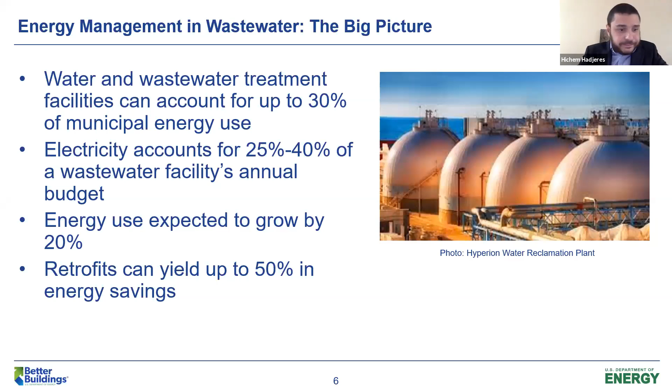Over the years, many examples have been documented that demonstrate significant energy reductions are possible through cost-effective measures. Building on the success, many in the industry are taking a broader, more strategic approach to energy management. To implement the vision, however, wastewater treatment plants are setting ambitious long-term energy savings targets and incorporating renewable energy as well.

We are in the era of big data. We have a lot of data points for everything, but the question is, what do we do with that data once we have it? As the wastewater treatment sector's approach to energy management evolves, the need for reliable and robust energy data management systems is growing as well. These systems help plants track progress towards their energy goals, and they help to determine whether their efficiency efforts are having a meaningful impact. It'll help them uncover opportunities for savings and also allow for comparison to other similar plants.

In short, to stay on the road to resilience and have a robust energy management system, our facilities need robust energy data management. Next slide, please.

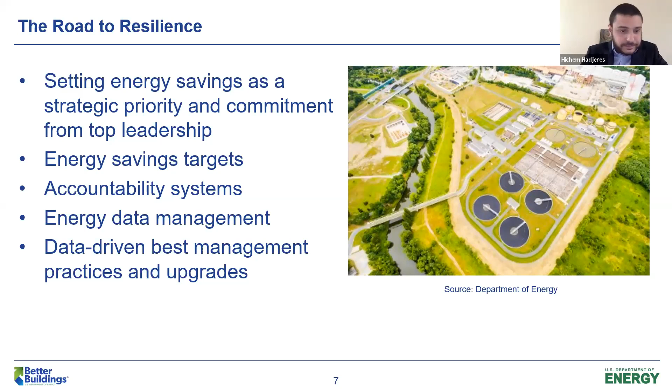So I'll transition to our speakers who will go over these topics. I'd like to introduce Shannon Zaret, who is my colleague at the Department of Energy. She is an energy technical project specialist. Shannon Zaret recently joined our office, and she is our office's wastewater and circular economy lead. Prior to joining the Department of Energy, Shannon served as a project manager for Booz Allen Hamilton, supporting the DOE's ARPA-E research and development programs, which focused on energy storage, waste to energy, and nuclear fusion. She was also at the United States Energy Association, where she worked on the Department of Energy funded consensus program to build global and domestic consensus on carbon capture, utilization, and storage.

Prior to joining the U.S. Energy Association, Shannon supported the U.S. Department of Energy's Bioenergy Technologies Office, nicknamed BETO. While there, she helped advance the office's priorities aimed at developing technologies for producing cost-competitive advanced biofuels from non-food biomass resources. Shannon, the floor is yours.

Thank you very much. Thank you, Hichem. So I'm excited to be here. I'd like to take some time to discuss how DOE has been involved in this space from a Better Buildings perspective. So let's start with the next slide.

Okay, perfect. So specifically, I'd like to highlight one of our Better Buildings accelerators that was designed to catalyze the adoption of innovative and best practice approaches in data management, technologies, and financing for infrastructure improvements and water resource recovery facilities. So the Sustainable Wastewater Infrastructure of the Future Accelerator, or SWIFt, as we refer to it, was a 3-year partnership with 25 state, regional, and local agencies that engage with over 70 water resource recovery facilities in their jurisdictions. And the overall goal was to accelerate a pathway towards sustainable infrastructure.

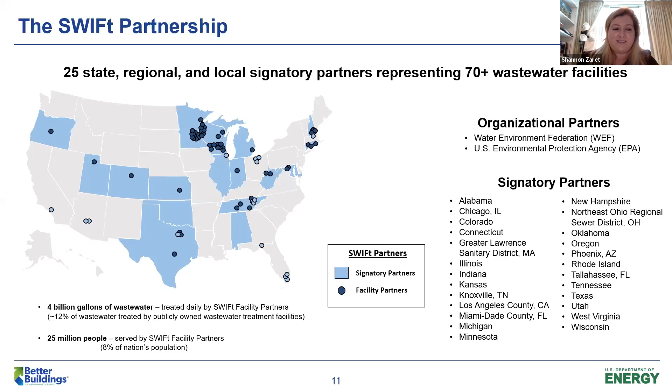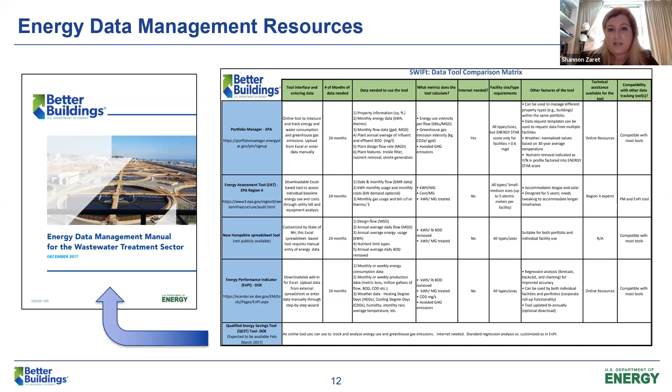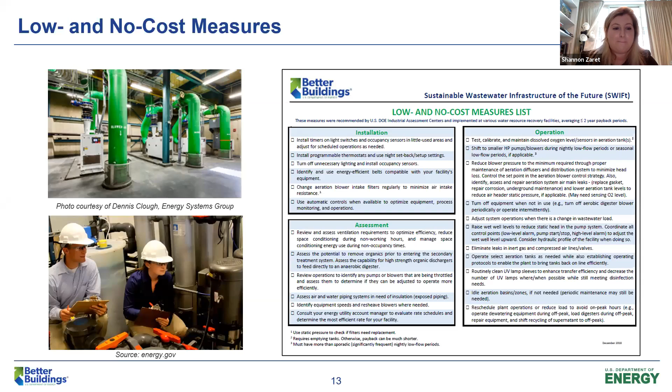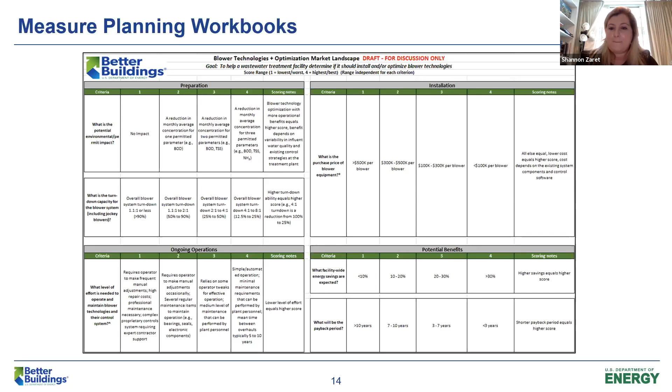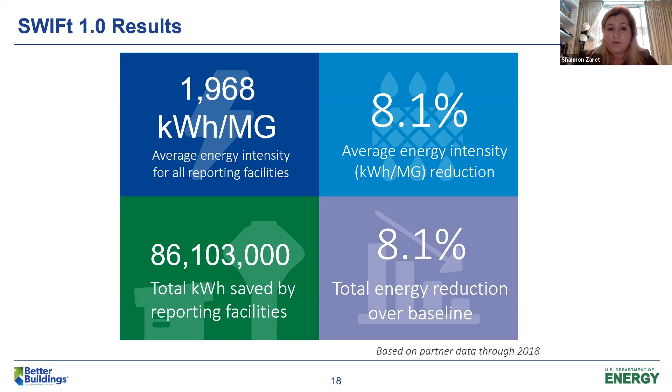Okay, so this is just a nice kind of summary graphic to show that SWIFt 1.0 partners achieved on average 8% facility-wide savings using these tools. And so this is data from 2017 and 2018, and we're actually gathering 2019 data, and we're hoping to release a summary fact sheet soon after the toolkit becomes available. Okay, so next slide.

Okay, so again, I want to emphasize that these resources that I just outlined will be released as the Wastewater Energy Management Toolkit in the summer of 2020 to help facilities learn and benefit from the work of SWIFT 1.0. But we're also planning on building on the momentum of this effort by launching a second phase of SWIFT later in the year. And so the details I'm going to plan to discuss later at the conclusion of this presentation. But now I'm going to turn it back to Hichem, who's going to introduce Wendy Anderson, whose facility actually participated in SWIFT 1.0. So Hichem.

Thank you very much, Shannon, for a wonderful presentation. Next up, we would like to have Wendy Anderson. Wendy Anderson is a senior engineer in the Strategy and Innovation Department at Metro Wastewater Reclamation District in Denver, Colorado. Wendy investigates energy technologies, tracks energy consumption, and manages the operations of a 6 megawatt combined heat and power facility fueled by biogas from anaerobic digestion. Wendy is a professional engineer and Class A wastewater operator in the state of Colorado and a certified energy manager.

Wendy will provide us with valuable insights on setting energy savings as a strategic priority at the facility level and how that enabled the facility operators to develop data-driven tools that allow them to analyze their energy data and optimize their facility's energy management.

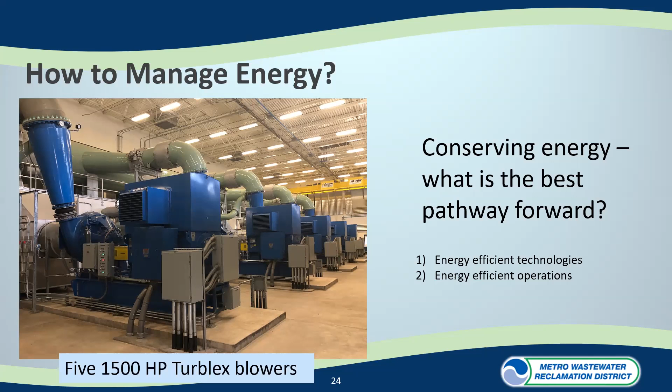So rather than adopt a conventional but somewhat rigid energy management protocol like ISO 50001, our facility kind of goes after discrete efforts we think have some chance of long-term success. Our goal is to make complex aspects of our operations easier to monitor and to manage using tools, and I'll show you a few. Next slide, please.

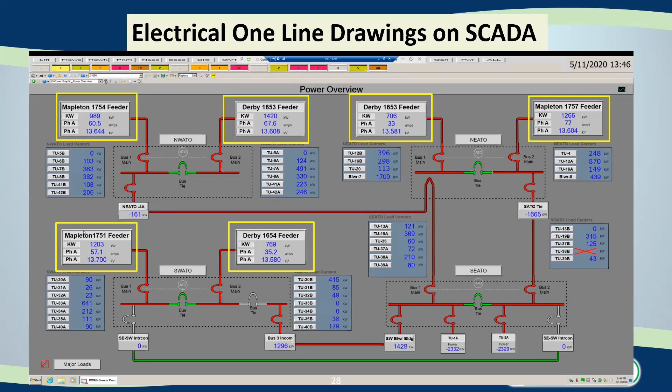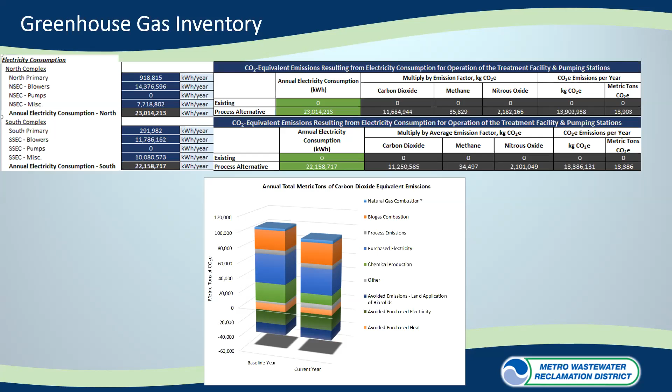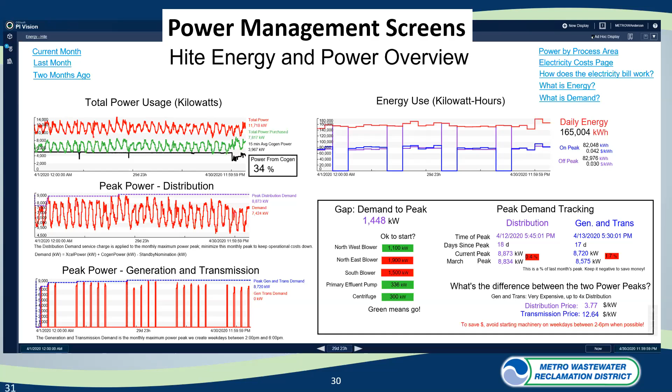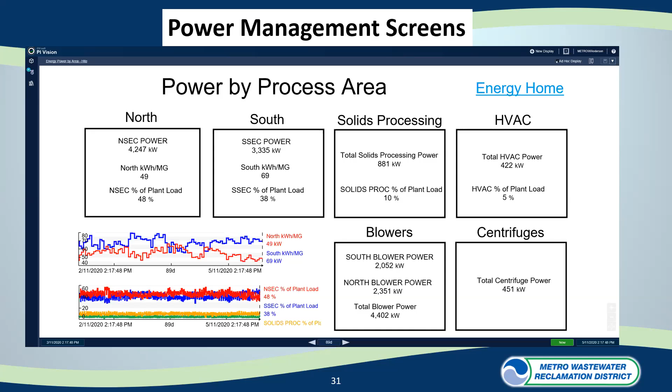So moving forward, that's a few of our tools. Using that same software, we're also developing monitoring and optimization tools for most of our process areas because we believe optimizing any process usually results in less energy use.

We've also begun to use artificial intelligence to optimize one of our process units, our wastewater disinfection system, which we hope, if we're able to implement it, will allow us to use less chemical addition. At least that's our hope.

So in summary, we believe it's hard to measure how tools like the ones I just showed you really help us conserve energy. But what the screens really do, at the very least, is bring the data out in front of the operators. It increases their awareness of our current energy consumption, and this visibility of energy information assists the operators with becoming familiar and comfortable with energy concepts as we slowly enact more ambitious energy conservation efforts.

We also believe that we should focus on keeping tools simple. Operators are busy people. We need to select designs that make it easy for operators to make the right decision quickly without a lot of study.

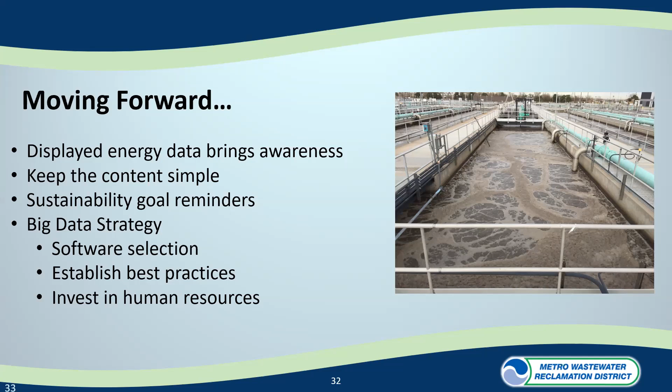And with that, I want to thank you for this opportunity to speak about data-driven energy management tools and data-driven decision-making. Thank you very much.

Wendy, thank you very much for a spectacular presentation. By the way, everyone, Wendy was actually a Swift partner, so she has been an asset, obviously to her community, but to the DOE as well, and she's certainly leading by example. I'll have to speak to what she said about the whole artificial intelligence thing. There were a lot of questions, Wendy, actually asking about the different software platforms that you use. And you speaking to the fact that at some point we have to streamline everything really points towards a direction that we need to be heading. So again, thank you very much for leading by example.

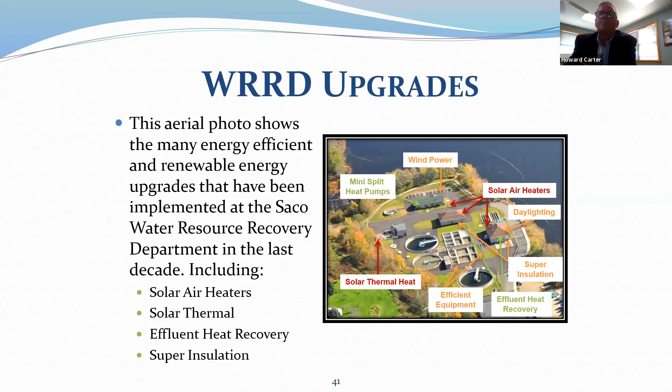So there's a picture of a mini split heat pump. I don't know if that's actually one of our newer pump stations. Like I said, you get a small building that's like 16 by 20, those do a great job. And there's a little wind turbine that we put up outside of our admin office. That's a story in itself.

Back when we started the energy committee, we had this one councilor: I want to have wind power, I want to put up a wind turbine. So we had this company come in. Okay, yeah. So I called down to UMass Lowell. There was a professor down there, she was big into wind power studies, and she says the first thing you want to do is a meteorological study. I go, okay.

So how much is that? She goes, oh, around 40,000. Oh, okay. So I tell the council, and they say, oh no, we're not gonna do that, we'll just put one up. I said, really? So we tried putting this little one up here by the treatment plant, by the admin building, which is right on the path. There's a big walking path right along here because we've got the river.

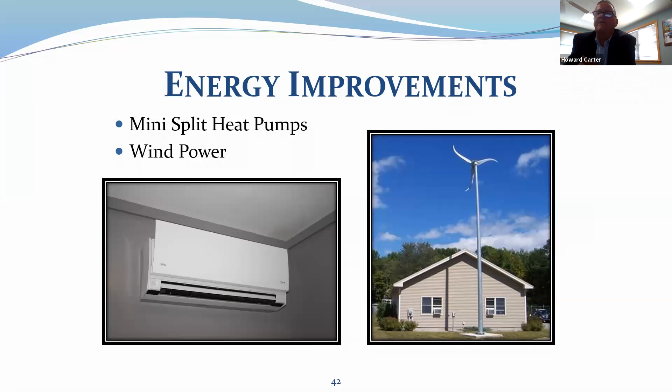And a word to the wise: just because you think it's windy doesn't necessarily mean it's windy. It didn't really pan out, but it looks good, and people still comment on it. But always be leery of wind power and always do a study first, because this one went to a bigger one that was installed downtown at a later date. Next slide, please.

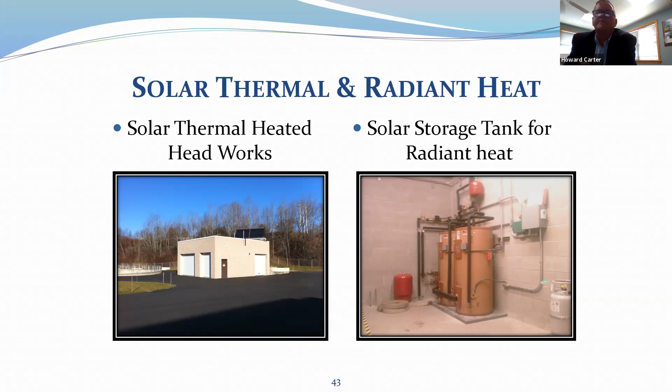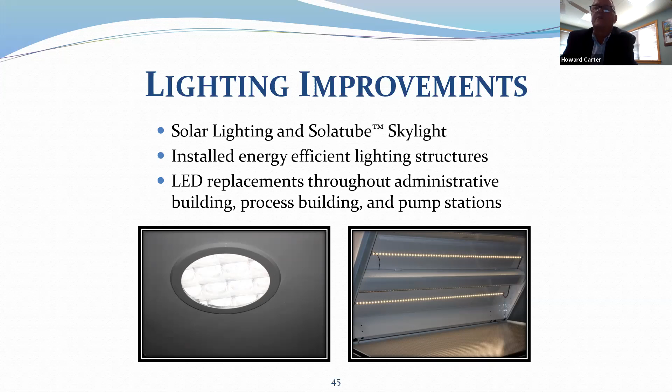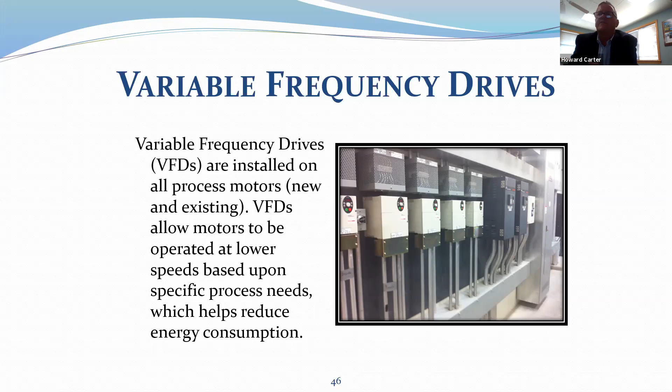You try to get a two-for with anything, whether it's going to membrane diffusers for aeration or BNR. You certainly need the VFDs, and we've had a lot of good energy savings with the VFDs. In this particular case, you've got line reactors in front of all of them. Next one, please.

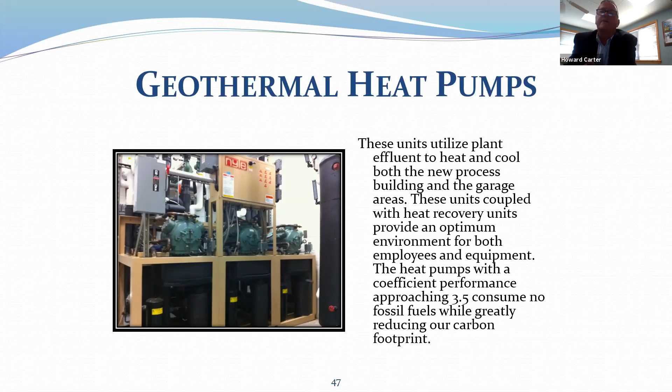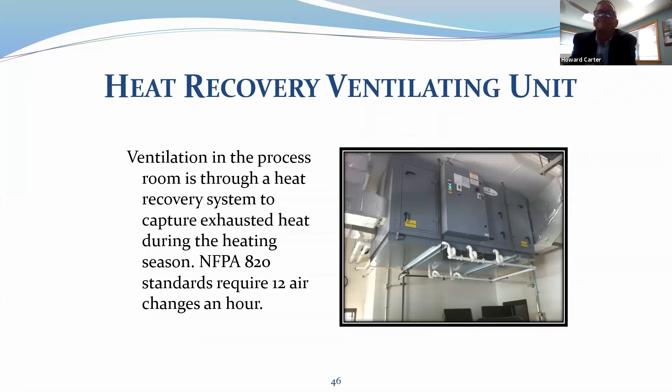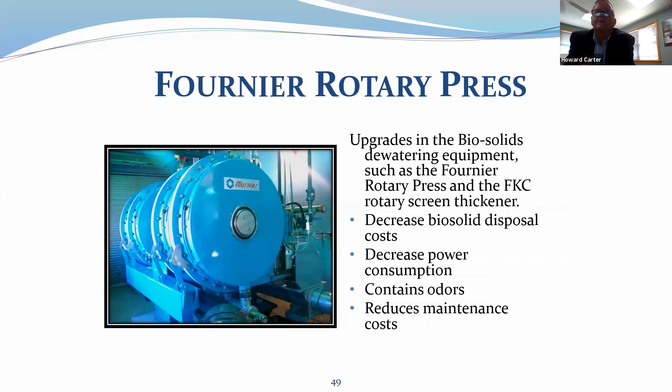So if you calculate that out at what we're currently paying, about 6 cents a kilowatt hour, that was taking us just over $2,000 to heat that process building and the garage. Now, conversely, that next winter in 2019, when we converted to propane, we actually burned through 4,700 gallons of propane at a cost of $9,000. So that to me just tells you how good that technology is. You just have to have the right one. If I had to do it again, I would go with a closed loop system and not an open loop. Next slide.

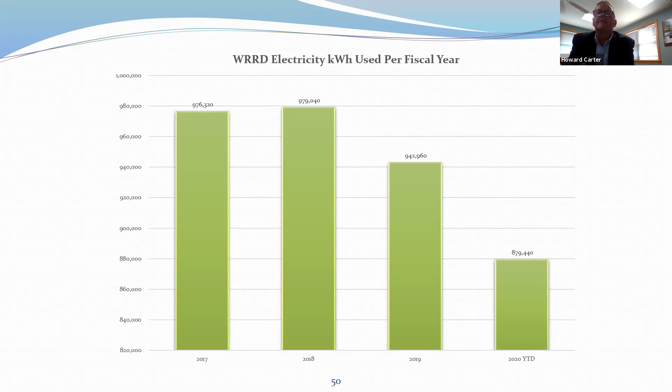Okay, and here's some things to consider going forward, especially for the small utilities. I know Wendy and her staff do a good job of tracking that data. But with a crew of 10, and 32 pump stations and all the other different things going, and your fossil fuels and stuff, some folks may want to look to utility bill pay and data collection. Now I'm not talking about the bills that you send out. This is more about having a third party such as Engie that actually pays your bills.

We just did a contract with Engie and it's going to be $3.99 per bill. But with that, they track all your usage. You get the graphs. You can see if there's a spike, if something's off, they notify you.

We had an instance last winter at a pump station that the propane spiked up like triple usage in one month. And we have so many bills in the city, as they're going up to accounts payable, it wasn't picked up and they were just signing off on that. Where if we had something like that, we would have picked up on that and resolved that in a hurry. So that's something for a small utility to think about.

And another thing, especially if you're a net metering state like Maine is, it used to be that if you generated your own power, you could go up to 10 different buildings with that same power. Now that's unlimited. So in our case, say we're in Central Maine Power's district, we could actually go through a third party and purchase all of our power through renewables. Say if we wanted to buy into a solar farm, we could buy 100% of your power that way, although I wouldn't recommend it. I'd probably stay at 75 just because of changes in the way you operate.